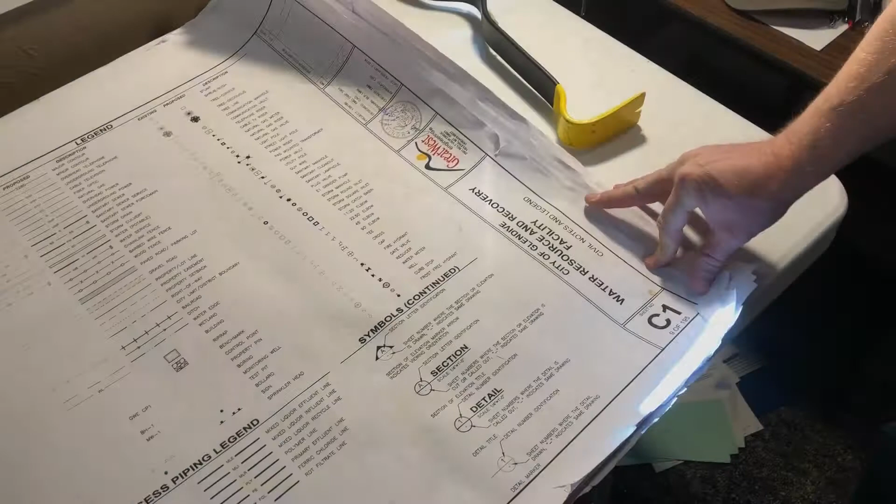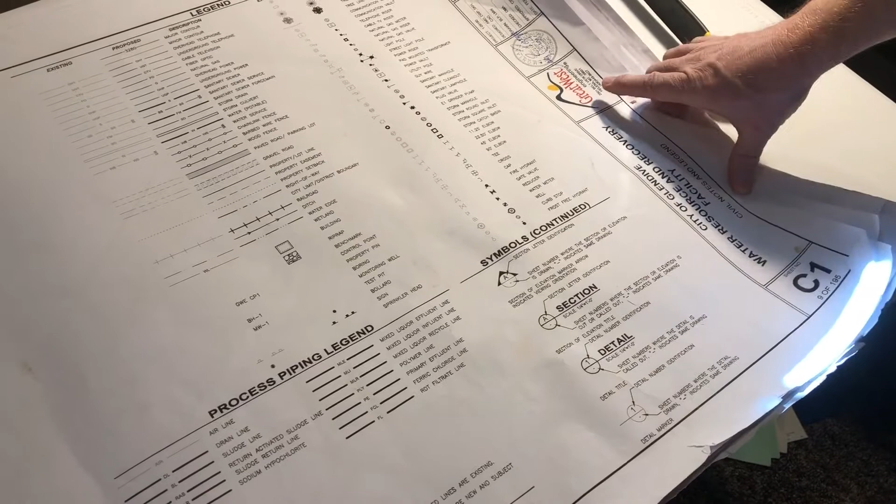These plans here are for the Glendive Water Resource and Recovery Facility, or in other words, the sewer treatment plant. They were provided to us by Great West Engineering out of Helena, Montana. Everything said and done, this was close to $20 million worth of work.

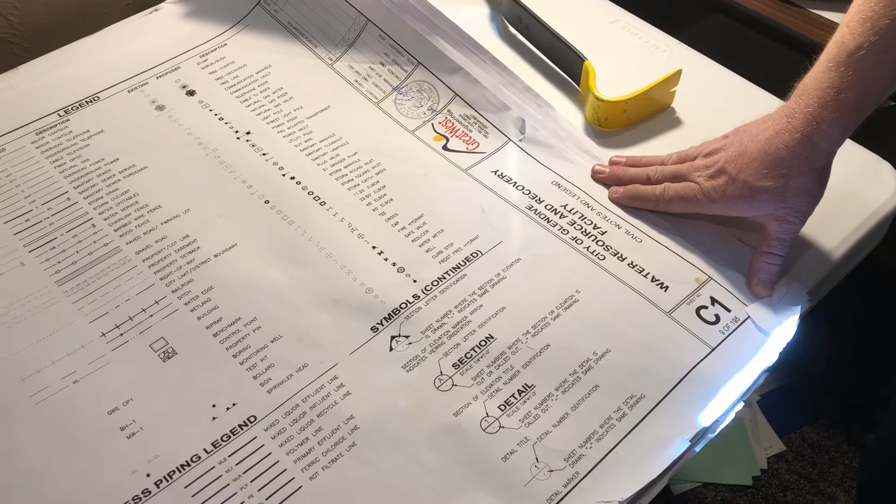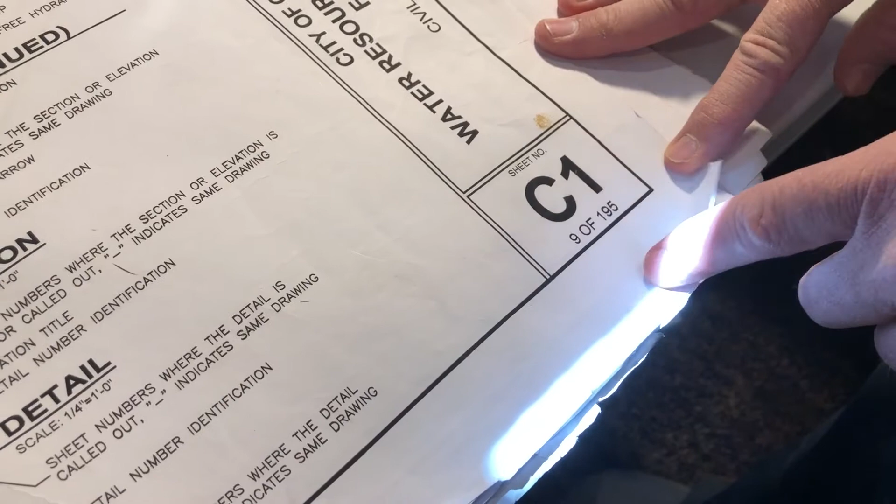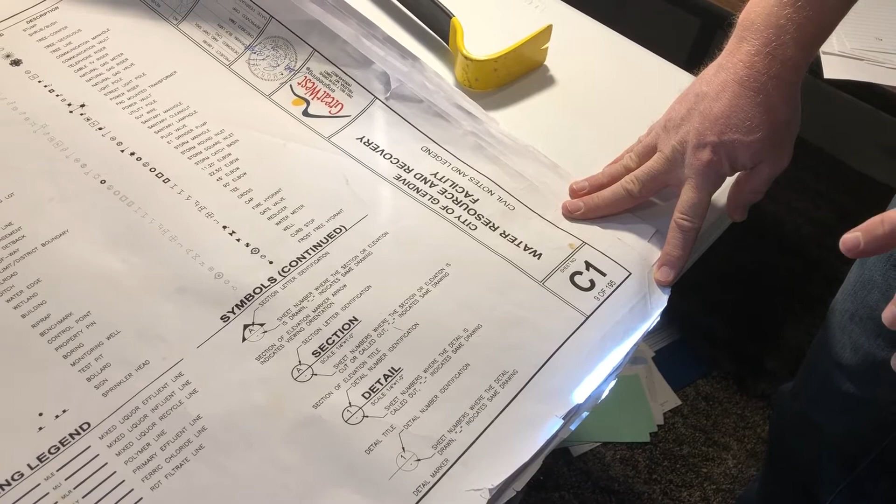What I have out here are the civil drawings, as we looked at previously when talking about drawings and what each letter and symbol means. So these are the civils, and this is page 9 of 195 sheets in this plan set. A plan set is a complete set of drawings and plans for a complete project. There's 195 of these 24 by 36 inch sheets of paper, and they're chock full of information. So let's get into this and see what a few of these mean.

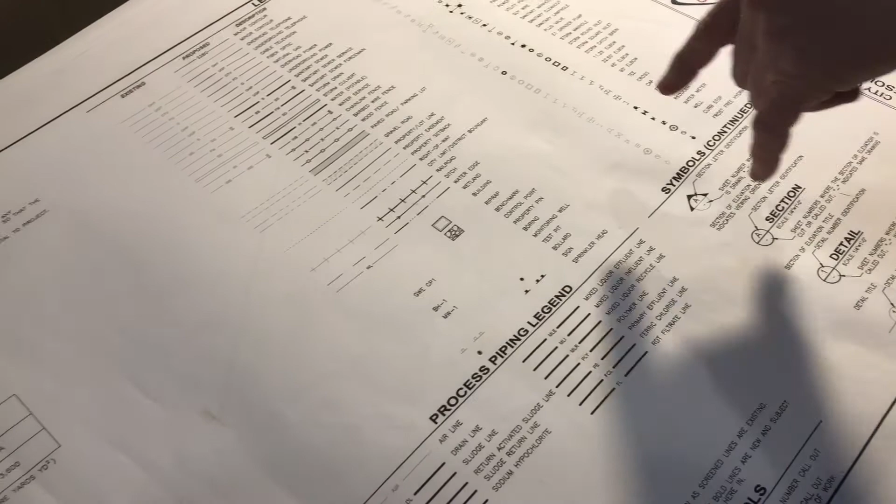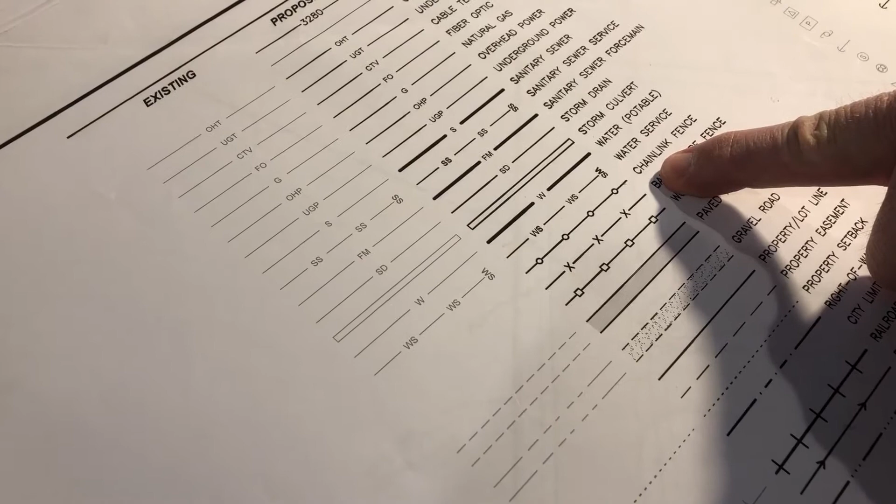On this first page, C1 of the civils, we can see it gives us a legend. We have things like chain link fence — this symbol, when we see it in the plans, means chain link fence. Here we have a water service. Here we can see lighter lines — those are existing, already in the ground when the project starts.

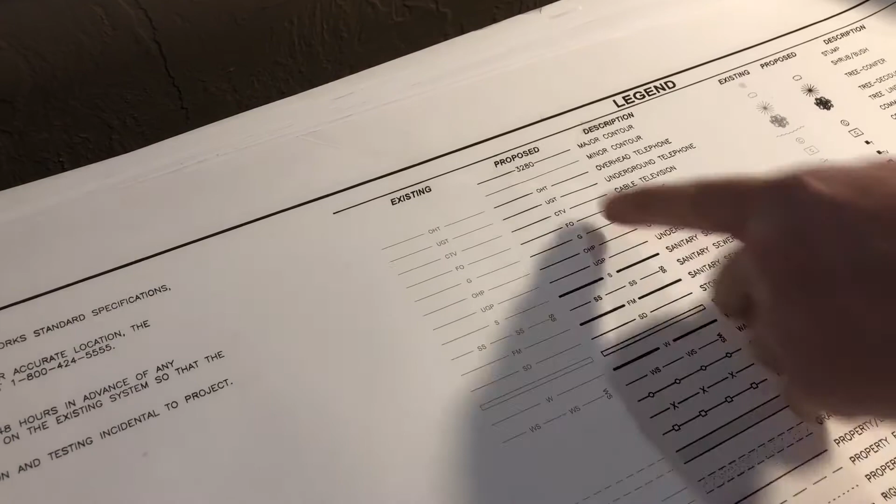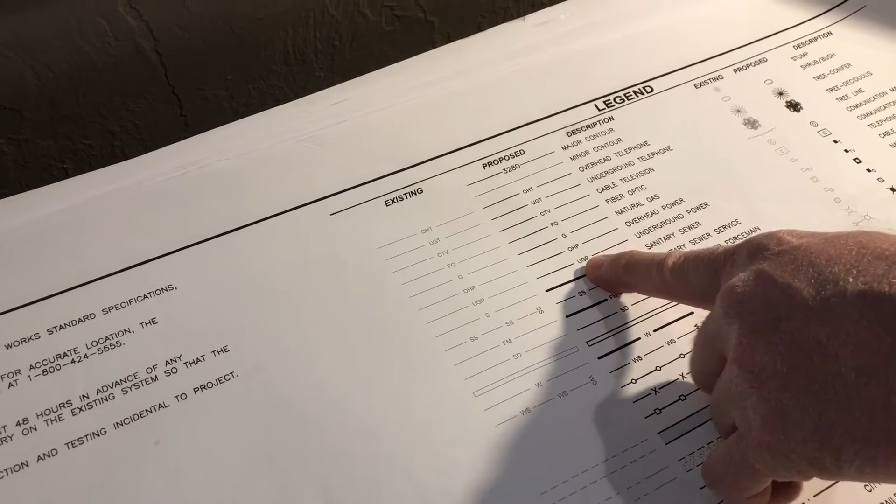The darker lines are the proposed. So we can see sanitary sewer service, underground power, labeled by UGP, light or dark, depending on what was already there. We've got a whole slew of different things to take note of, symbols to tell you the different sections, page numbers, and how you find those things.

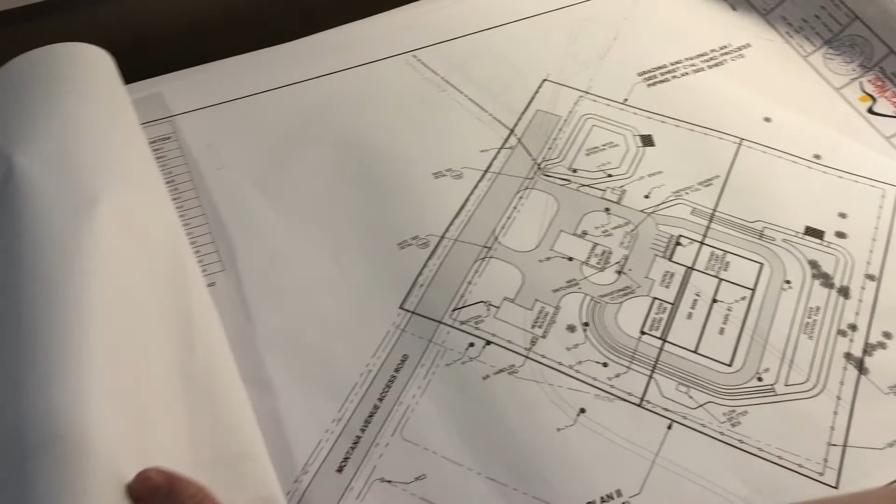So that's sheet 1. Sheet 2 kind of just gives you a real general idea of what's coming — this is a bird's eye view of the entire plant, the proposed plant. This is Montana Avenue, a street coming in, then here's driveway loops and parking, and here's the sewer treatment facility with the various buildings.

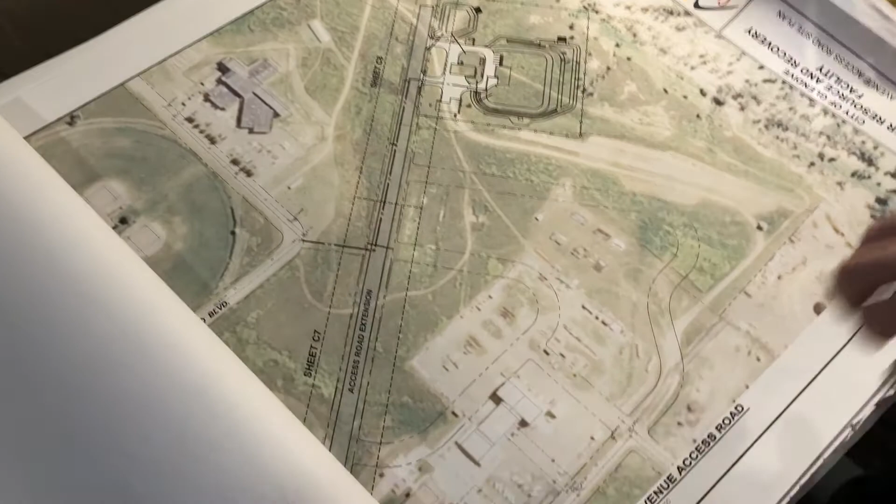Here's just a larger overview of how it sits in the neighborhood, and then here's one with it imposed over a satellite image.

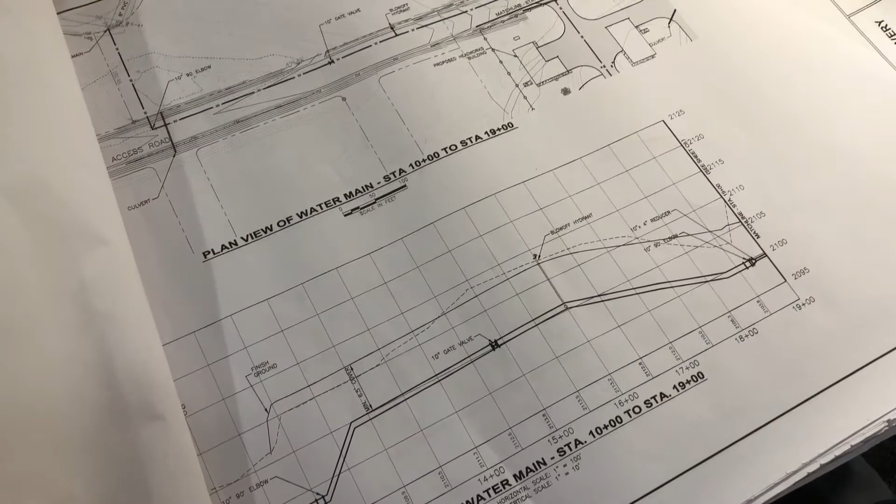Now we start getting into sections for a more close-up detail. So these are — actually this is a profile of the water main. You're looking at this not as a bird's eye view, but straight horizontally across, to see how it goes down and comes up and around.

And we're coming in on the road here. Let's go over to starting to get into the road sections of how you build the road that's going in there.

Now here's one section. The plan is over here, so it's just showing the road going into the driveway section. The road is labeled by station marks, so if we take a look at this 16 plus 00...

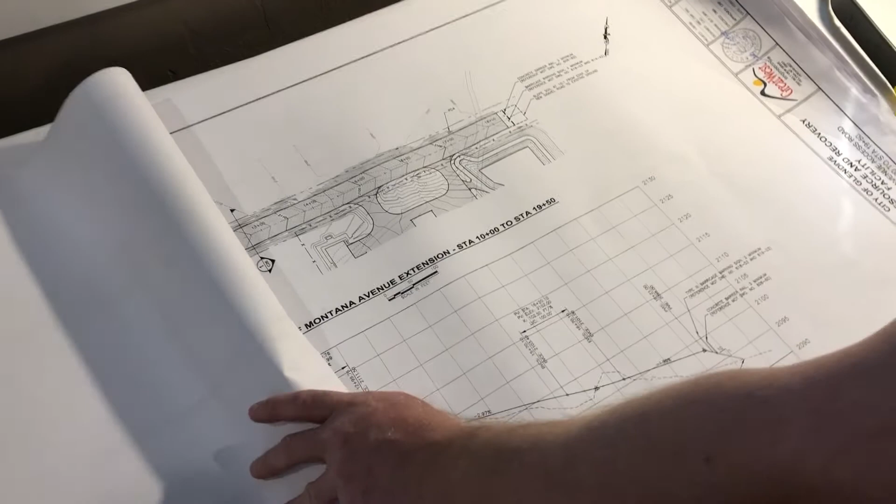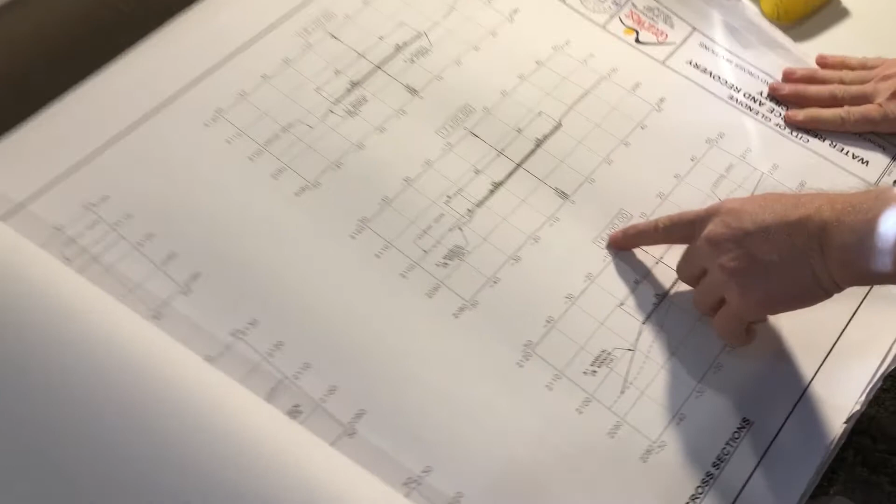So we turn the pages until we come up to detail 16 plus 00. Here's where it shows our road profile now.

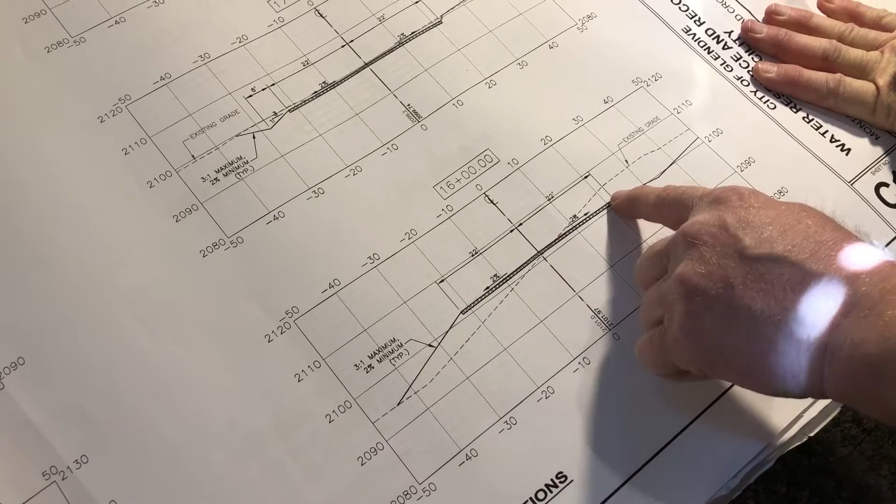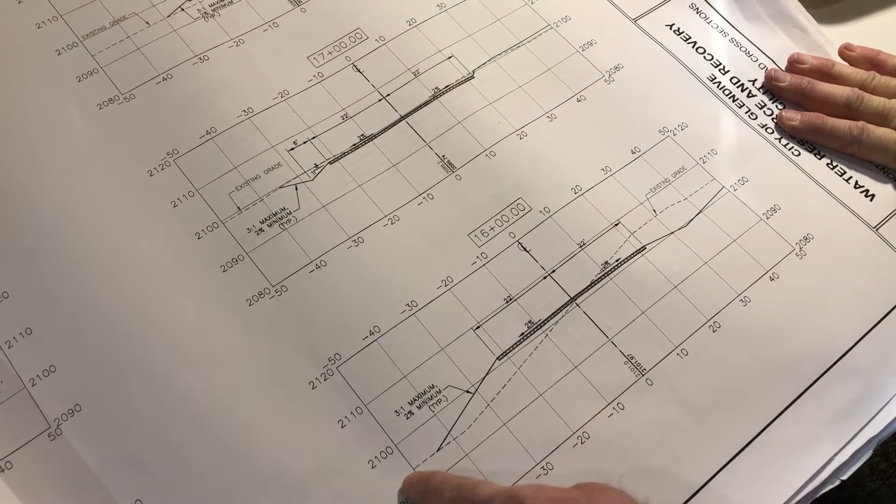We can show what they want — the darker lines show what they want the finish grade to be: 3:1 maximum, 2% minimum typical. The road widths, the crown, 2%, and this dotted line is existing grade. So this is the cutting and filling we'd have to do to the native ground beforehand to get what it would now look like once the road is built.

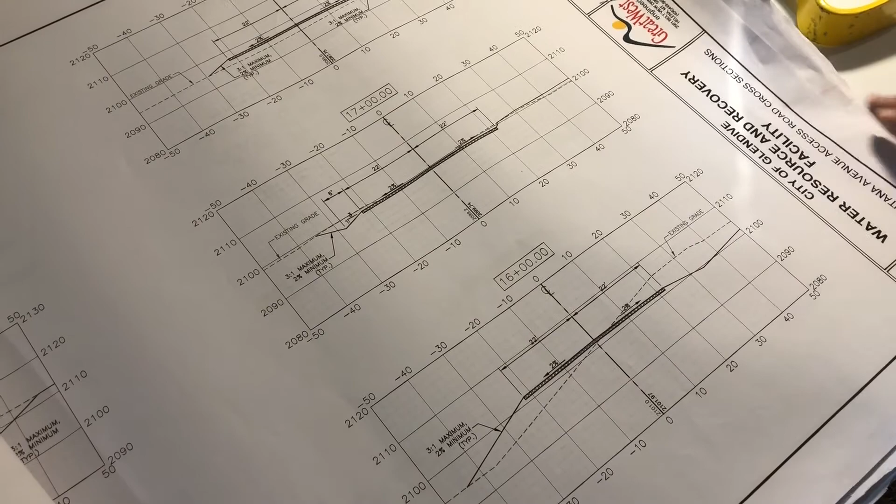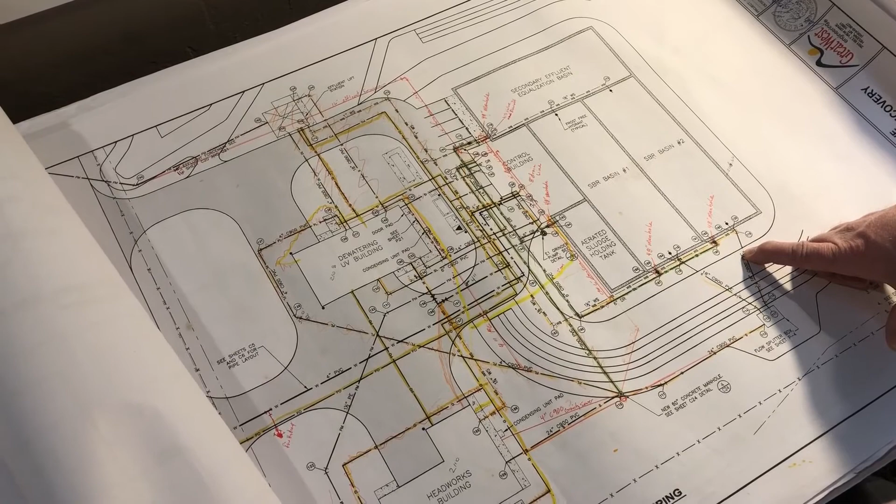So these are pages upon pages — a good set of construction drawings is what these are, what a contractor has. As you can see, they're frayed and used and marked on, because we have to do our as-built. Once we actually put things in the ground, sometimes they might not be exactly right — we might have to move something over 12 inches or so if we're doing site work or civil work.

So that's what all these markings are for — our notes after we installed everything, so we can come back, give this to the engineers, and they can update the final plans when the project is done, showing actually where everything ended up on the plan.

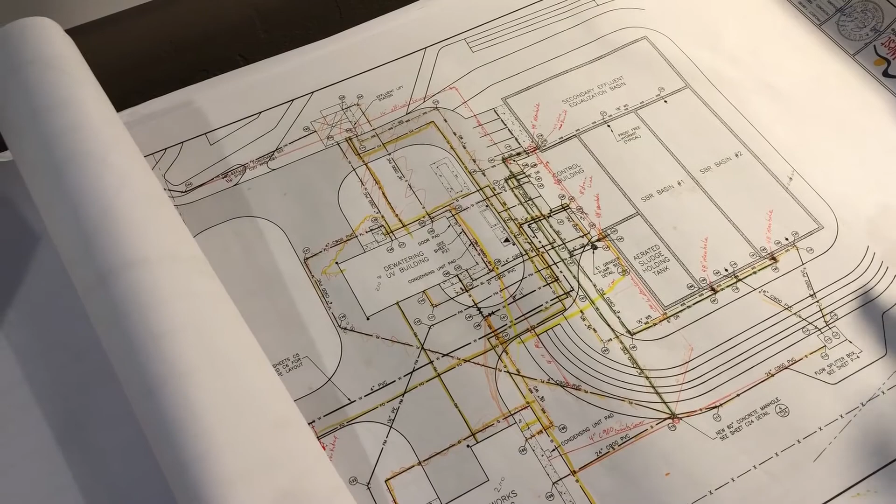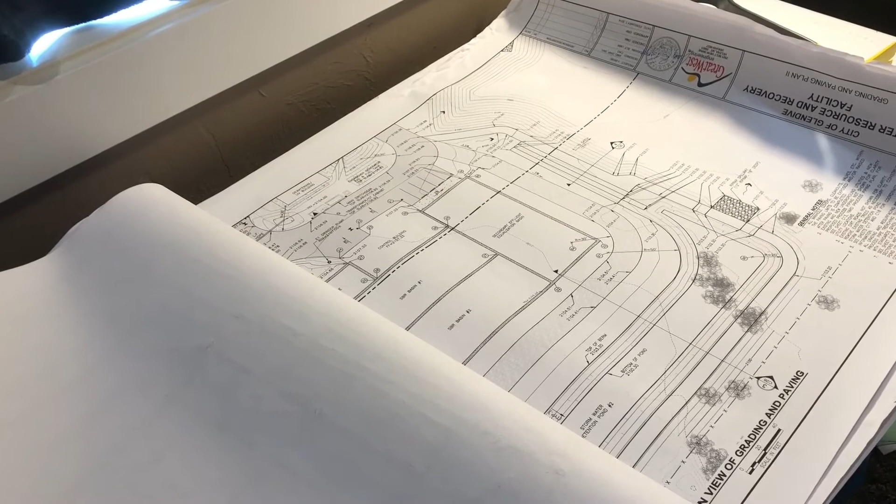But this is a pretty big project, pretty complicated, with a lot of sheets and a lot of detail. Since most of you have never seen the wastewater treatment plant, especially the before, during, or after, we'll switch gears here to something on a project that's maybe a little more simplified that we can dig into, something you guys are familiar with.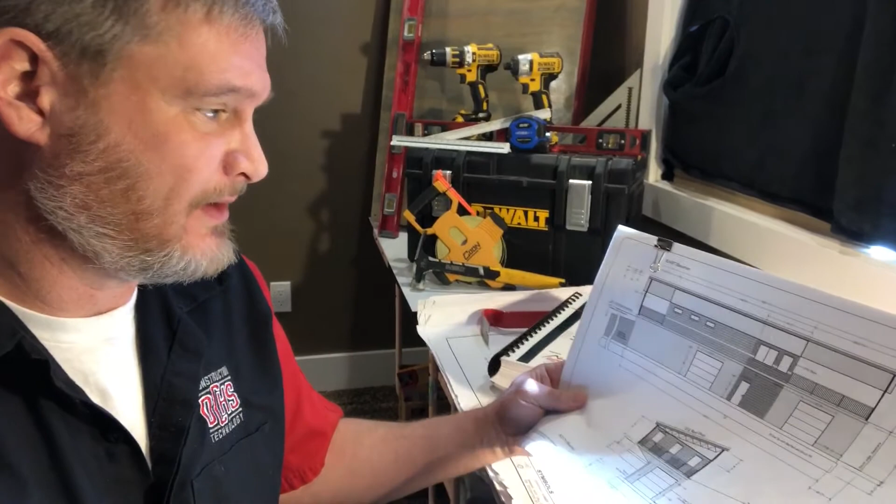All right, we're going to get going here on a little bit smaller project that most of you are a little more familiar with, and that is the Dawson County High School concession stand project that I designed, drew, and constructed for the Glendive High School. As you notice, these plans were designed to fit on an 11 by 17 piece of paper, which was easier to print and hand out to various contractors and people that wanted to see the plans.

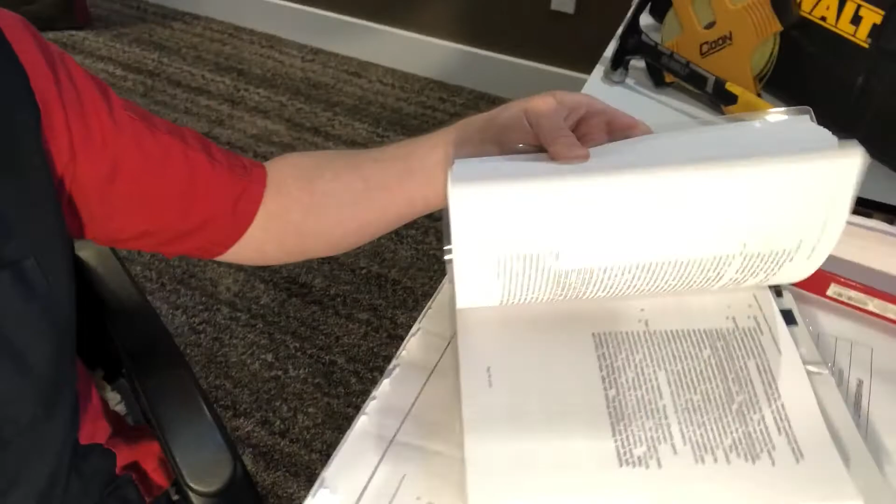Going back to the wastewater treatment plans, those are 195 pages. That doesn't include the project manuals that are a couple inches thick in themselves, chock full of all kinds of technical information and details about specific products, assembly procedures, and things like that. So what we're going to be moving on to is a little bit simpler than that.

Now, plans, blueprints, diagrams, drawings, they're all instructions on how to build something. Depending on the complexity of the project, they can be very detailed, or the detail can be only on certain elements that need more explanation.

As we take a look at the Dawson County High School concession stand plans, we can see that they're not nearly as complicated as the sewer treatment plant we were looking at earlier. There's only 11 sheets here that are 11 by 17. Even though there's not as much on here, we have all the information that we need.

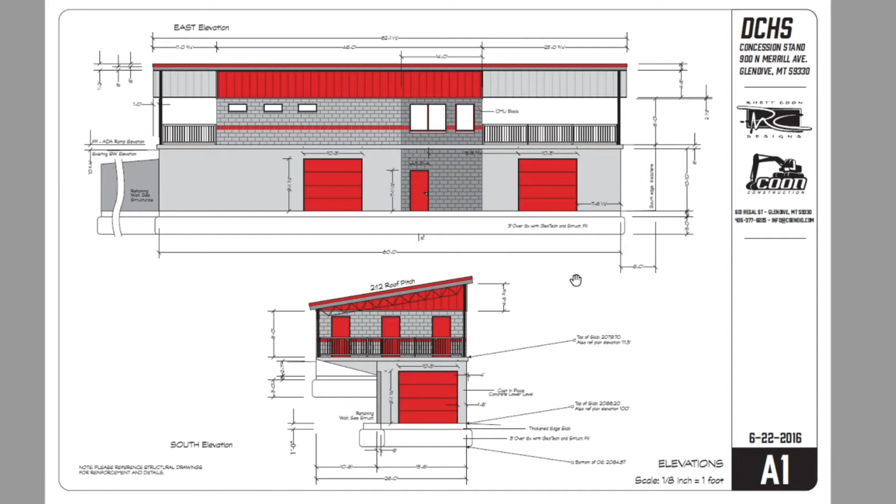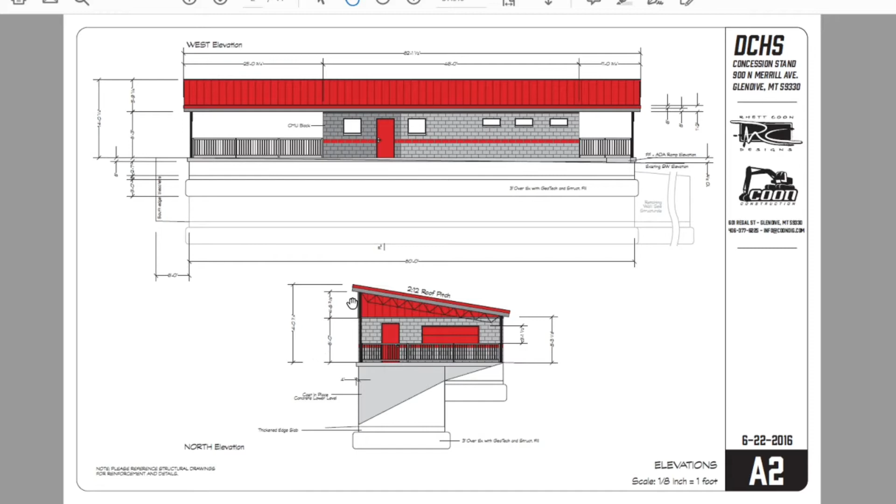With that information, we have a view of each side of the building, and that would be called an elevation. So we have our east elevation, south elevation, west elevation, and north elevation - that's all four sides. And then if we look at a bird's eye view straight down on it, we have the footing, foundation, floor plan, and we also have our upper floor plan.

If we look deeper into these, basically with the simple layout of this building, we just need measurements. Corner of the building to corner of the building, 46 feet, and that shows that from the outside edge. Within there, we have the window spacing, door spacing, and everything is ADA handicap accessible.

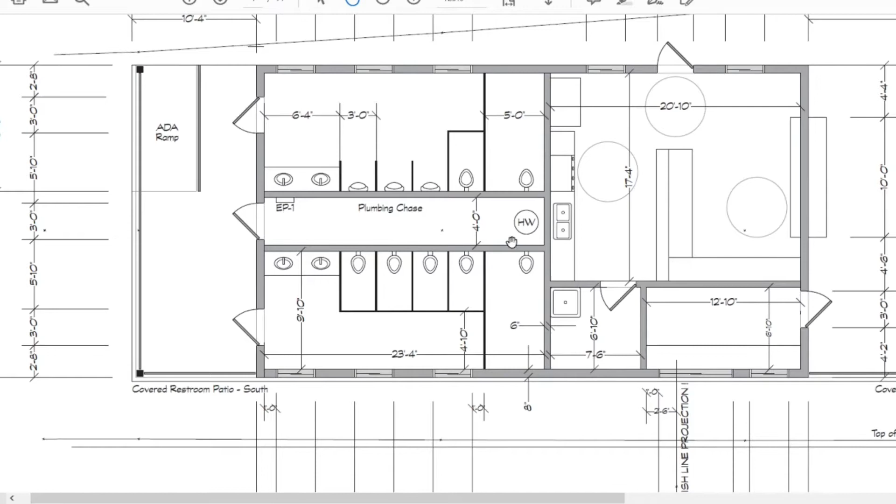We have an ADA ramp here, and we can see what our stalls in the bathroom are. So basically, with this building and all the 90-degree perpendicular walls, it's just a matter of spacing, and so we have all of our measurements within each room, including the inside measurements.

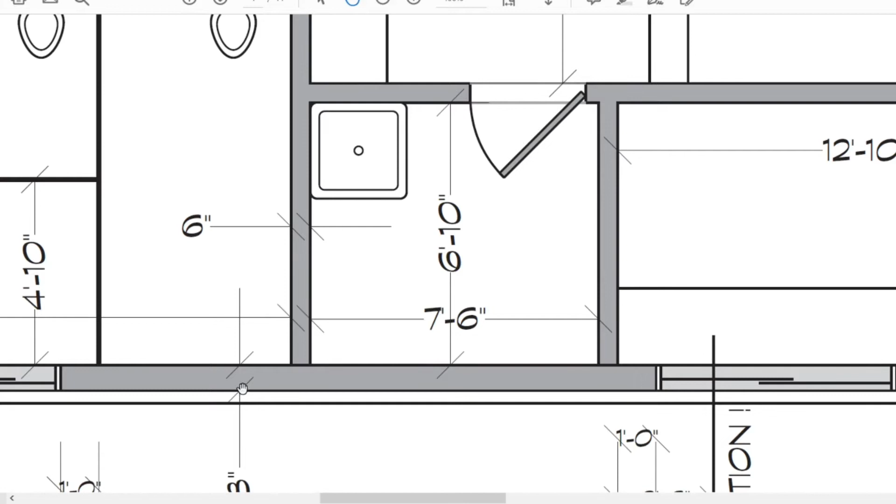You can see when the hash goes through that line, that means it's measuring from the inside of that wall to the inside of that wall. Other measurements that are showing - that slash and that slash - is showing that that's an 8-inch thick wall.

So we have all of our measurements on all these views, whether it's the floor plan or the elevations, and that is the most important thing for this construction as far as just the contractor building things.

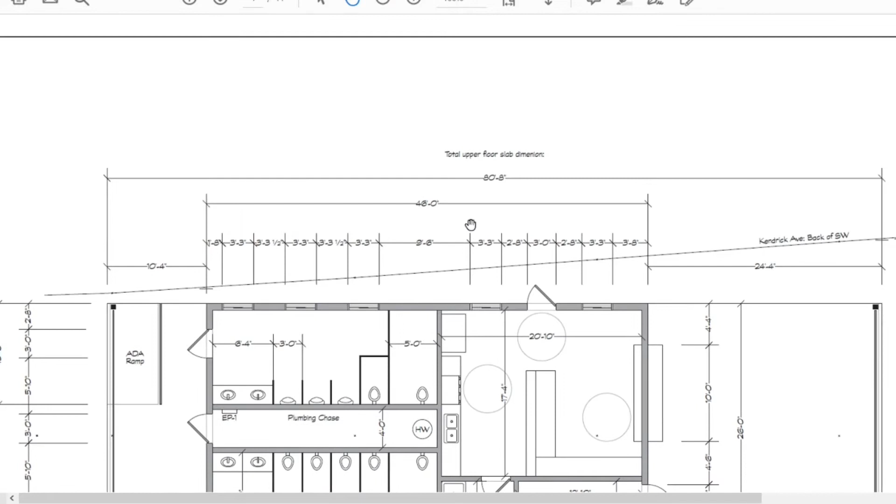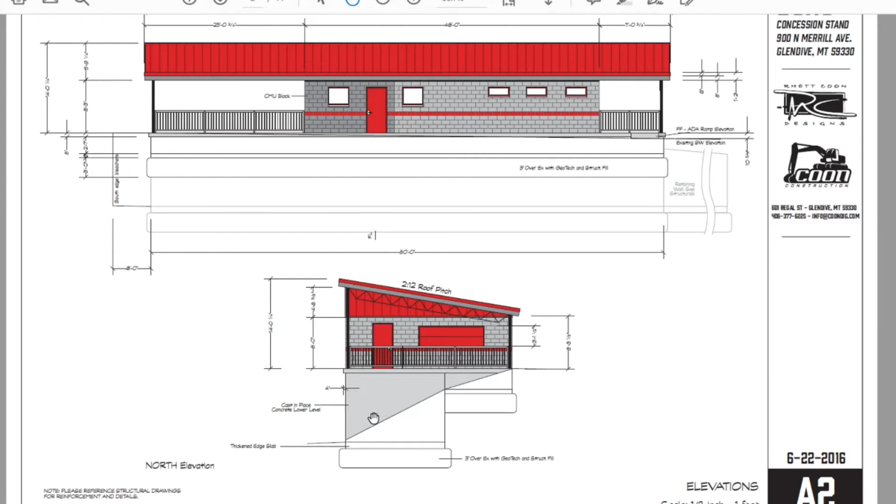Now, where we get into needing a little more information, a little more detail, is on the structural side of things. Everything else that's decorative is pretty straightforward, going with a particular red metal roofing product and the fascia soffit. So we know what CMU block we're using, railings. So what in here do we need more information on?

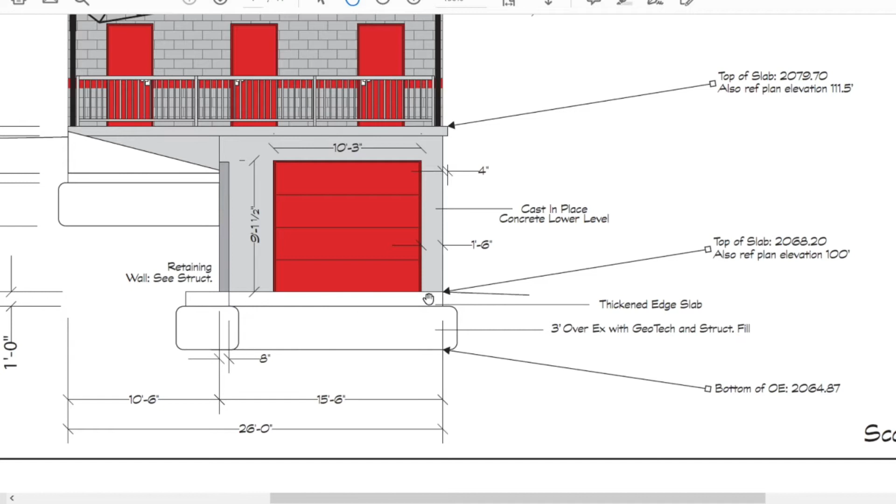Okay, this is our south elevation again, and this is showing the end cross section of our retaining wall right here. We know that it has - I have stated on here - 3 foot over X, that's over excavation. We dug it 3 feet down before we poured our foundation and floor with geotech and structural fill. We also see here that it says retaining wall, see structural. If we see this note, we have our basic measurements on here and how far to overdig, how wide our overdigs are, but we also know that we need more information.

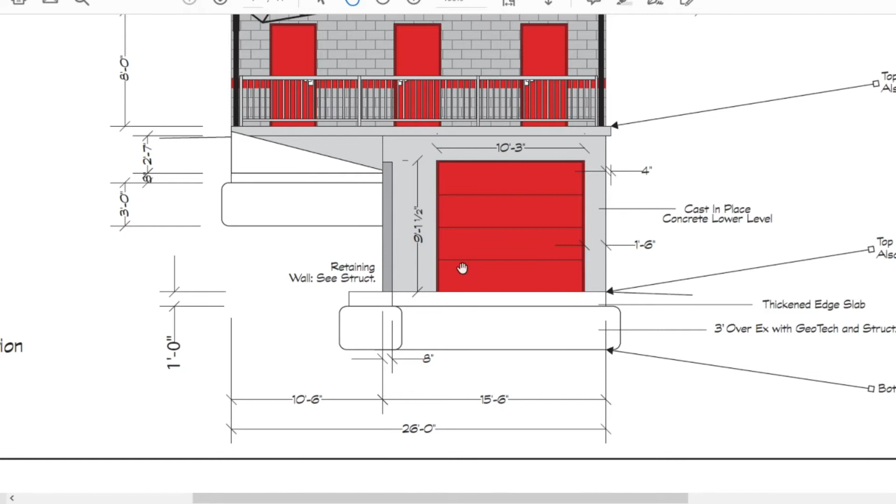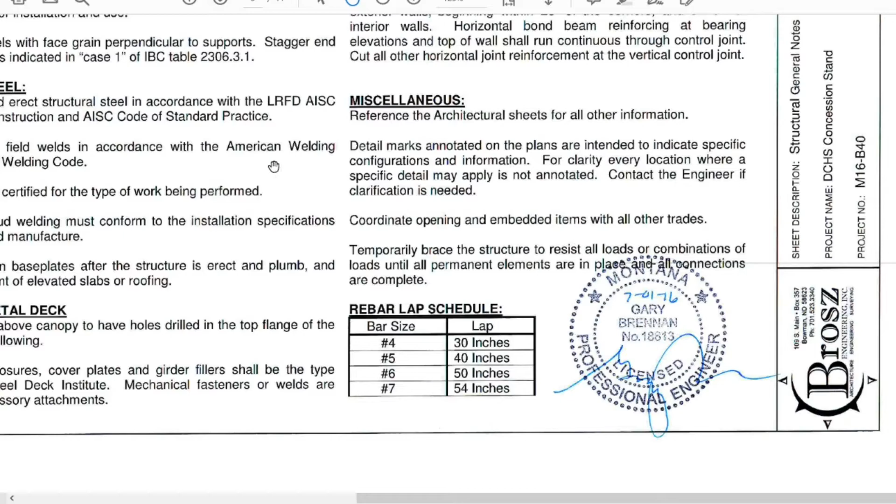So let's go down and see if we can find the structural detail. Here we have structural notes from the structural engineer. All the structural elements on this building meet code requirements for building permits and everything else, everything from wood framing, materials, structural steel, masonry, and we get into foundations.

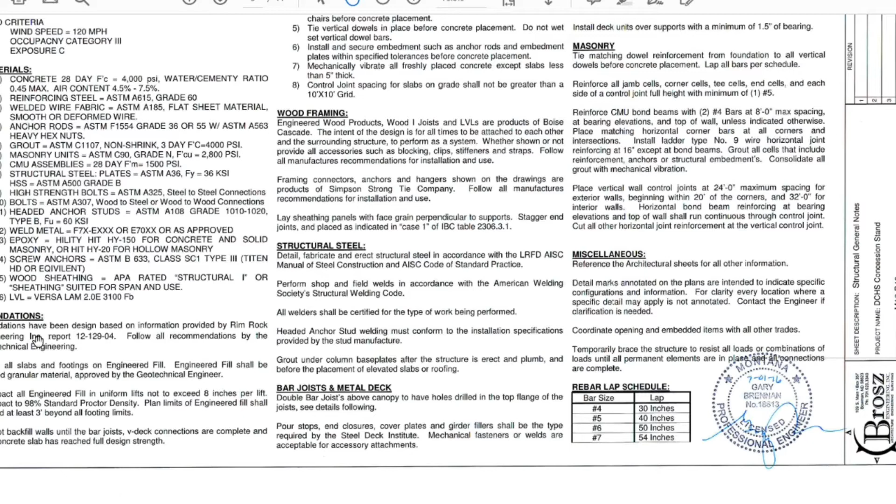So this is the notes. All the information on here is referring to something. So if we see the foundations, that's what we were looking at up on the sheet above. We also see that there has been some other design based on information provided by Rim Rock Engineering, a geotechnical engineering firm that we had do engineering on the subsoil underneath the building.

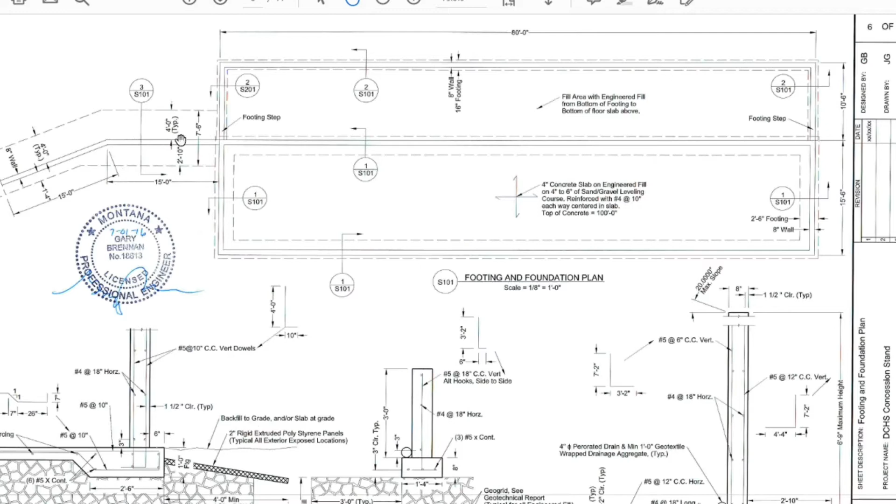When we take a look at the structural engineer's sheets, we have the same footing layout that I have in my sheets in the architectural section, but now he's added notes to that. So this is the retaining wall coming out here, and he's got additional measurements that pertain to the structural engineering side of things. So he's got 3 S101. S is for structural, that's what we're looking at.

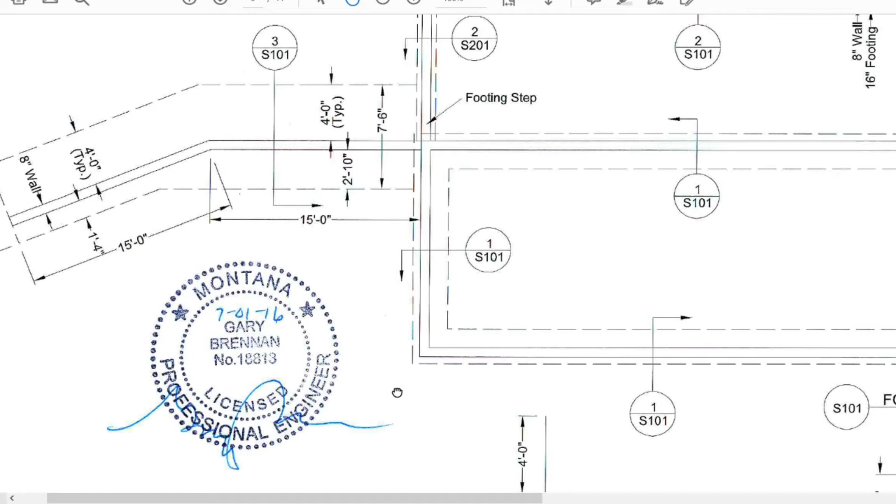So this is a structural detail that he's calling out. It goes through this wall, this line goes through that wall, so that means it's a cross-section detail view of this retaining wall. Let's go see if we can find 3 S101. And if we come down here, we have 1 S101, 2, and here we have 3.

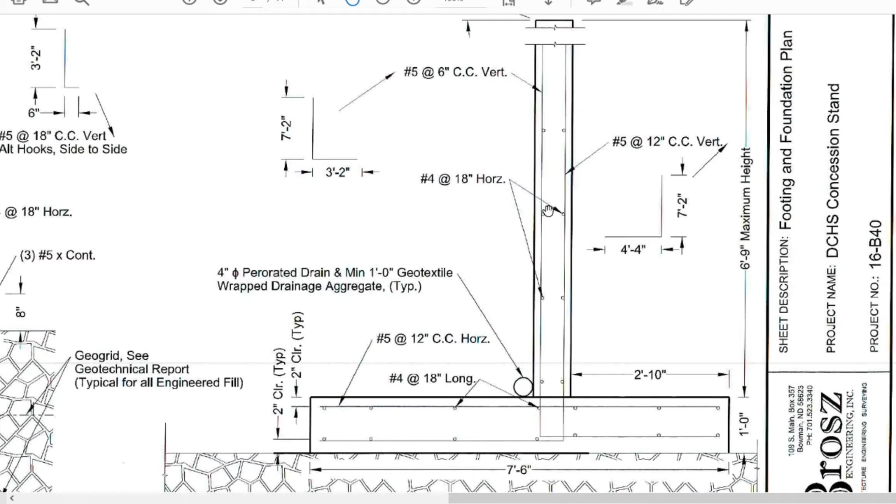So these retaining walls and the walls of the basement of the building are really stout. They have a double vertical stack of rebar, and every 18 inches there's number 4 horizontal rebar. So there's a lot of rebar in those walls, and then how it ties into the footing - this piece of rebar comes over and this one comes over. It's tied into this footing, so we were able to get a lot of strength out of this wall without having to do a super deep foundation.

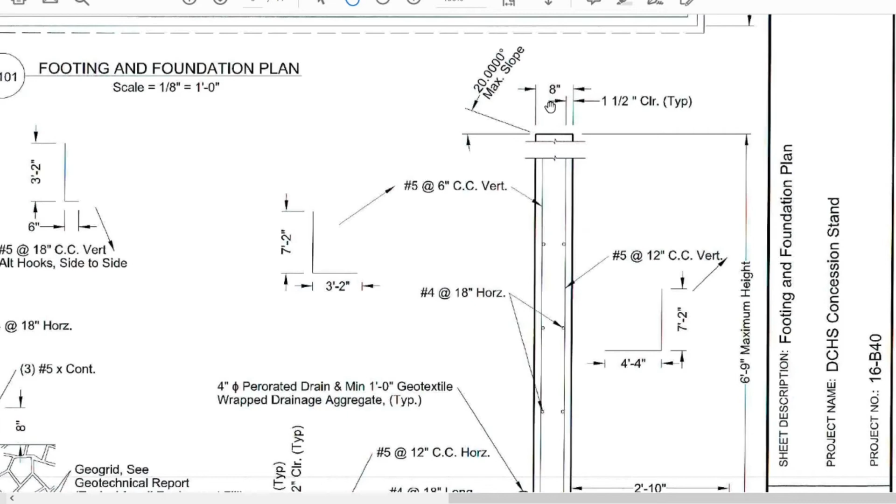With this, it's just measurements. Everything is showing you measurements. So here for our subsoil, and this is referring to all 3 of these details, is the geotechnical report from Rim Rock Engineering. And we'll take a look at that now.

So here we're taking a look at the Rim Rock Engineering geotechnical report. We can go down here and see their credentials. Rim Rock Engineering specializes in geotechnical engineering. They don't really do any other kind of civil or structural engineering, it's just strictly geotechnical. So we had them come out.

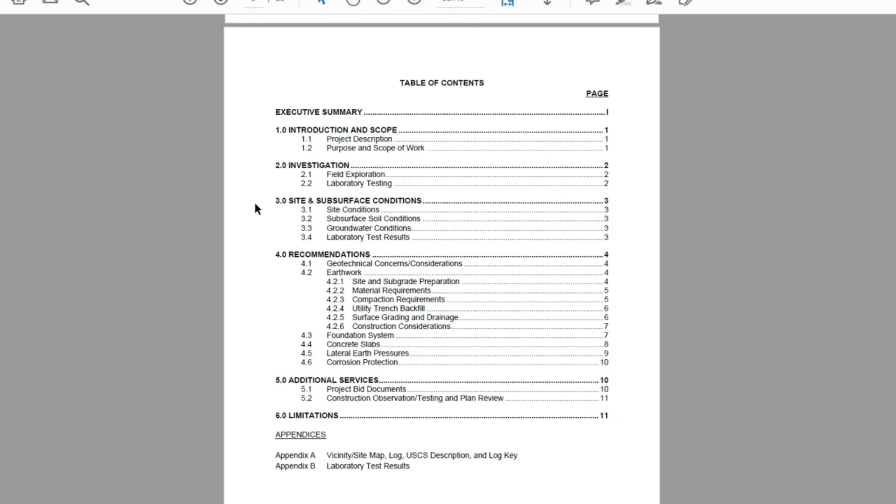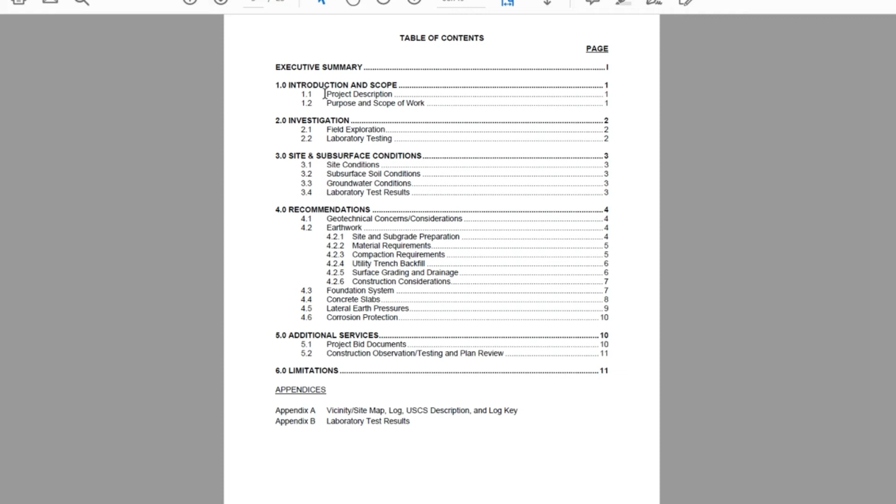They did core samples and boring of the soil underneath where we were going to put the concession stand. With that, they give you a report, about 25 pages long: field exploration, laboratory testing, site conditions, and now here's where we get into their recommendations.

So geotechnical concerns and considerations, earthwork, compaction requirements - everything that we need to know on how to prep the subsurface and get ready for a foundation. They also give their input on the foundation design for the type of soils that it's sitting on. This is really important, and this should be done on any commercial building. I would even do it on any residential building you're going to build. You can't have a solid foundation unless it's on a solid foundation.

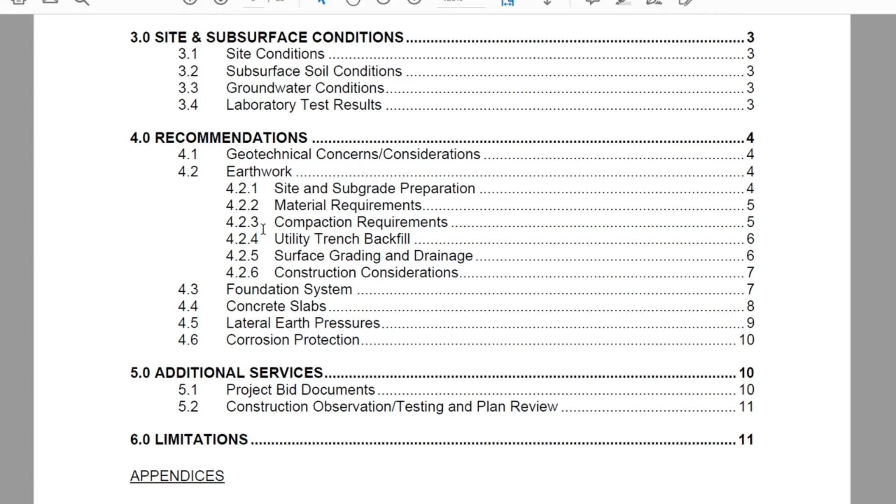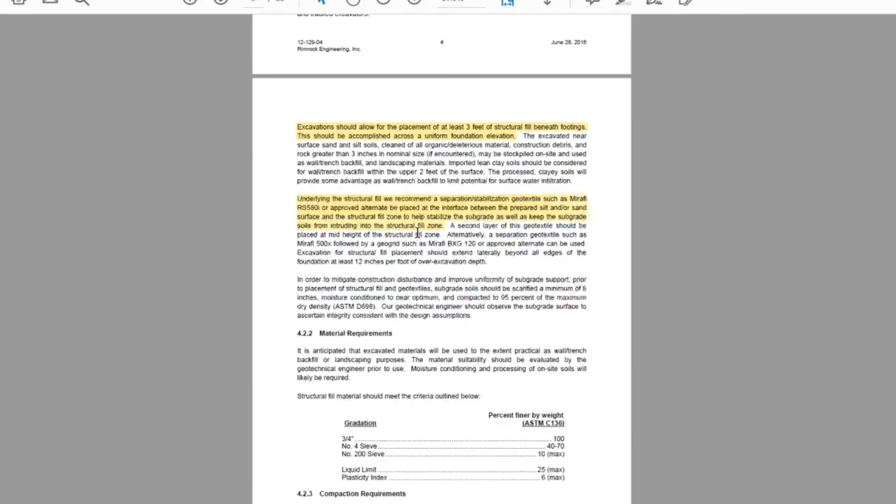If we go down here to their recommendations, we'll see that excavation should allow the placement of at least 3 feet of structural fill beneath the footings on a uniform elevation. We also see that we have separation stabilization geotextile, which gives a separation between the imported structural fill and the native dirt that's there. So with that 3-foot overlay, we now have a solid structural bridge that building is sitting on.

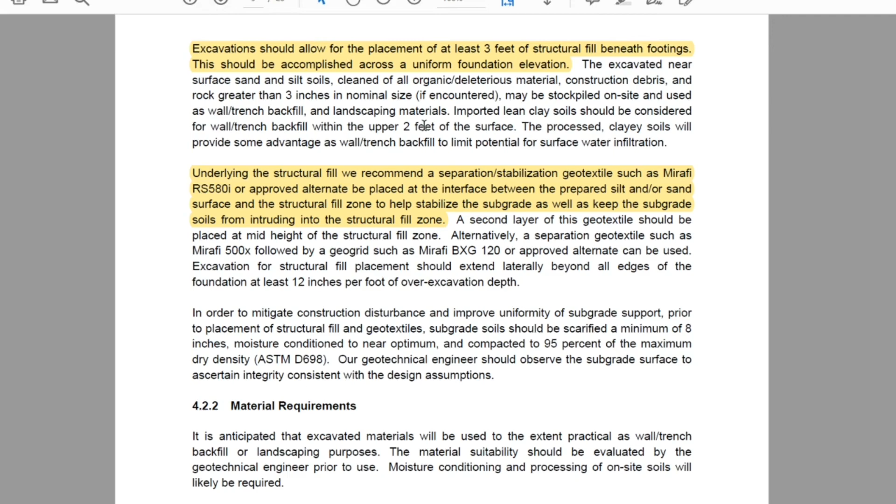Makes it incredibly solid. So now that we've studied the plans, let's swing over to the concession stand and take a look and see how the plans translated into the finished product.

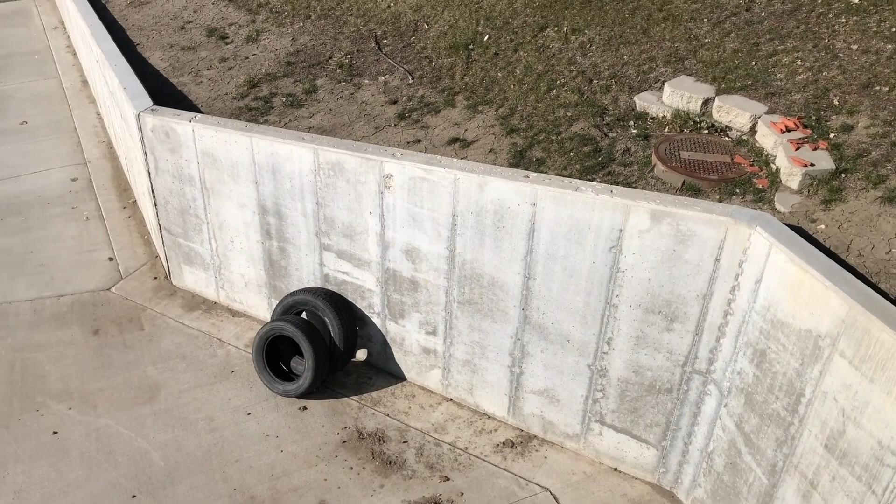Well, I think that wraps up this video on the very basics of reading construction plans and how they tie into an actual construction project. And I hope you got a little something out of it. We'll see you later.